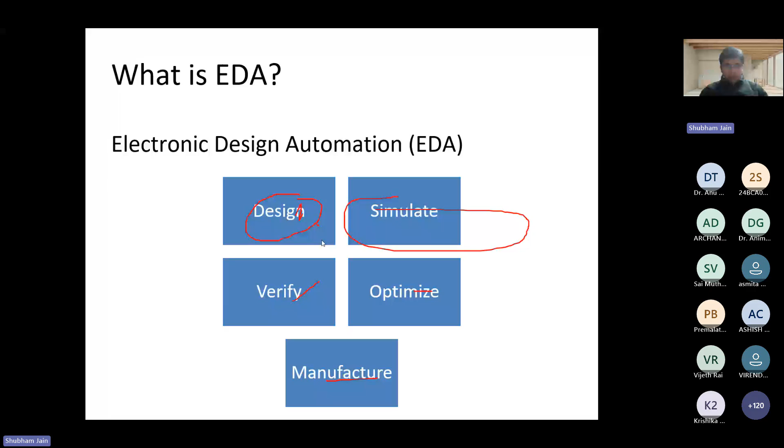So this is it. Just a moment, I need to give me a second, I'll be back. Just a moment, I think my daughter has some problem. Give me a moment.

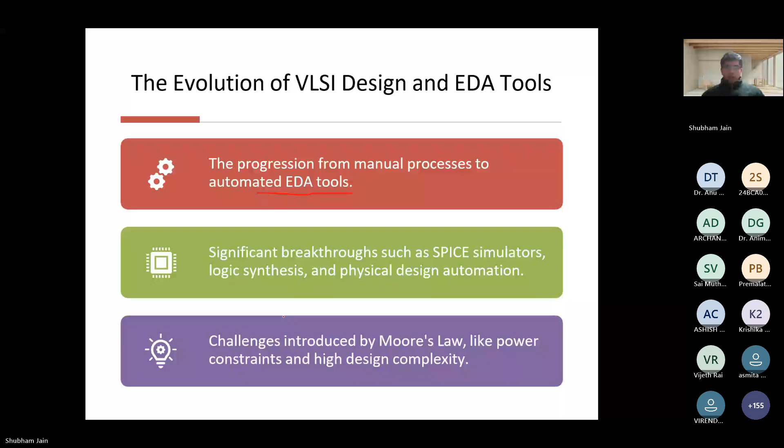Next, coming to key categories of EDA tools. These are the different phases of a design process which a company normally follows. There's a front end wherein the intent of the design is captured using HDLs, for example Verilog, System Verilog, or VHDL. At this level simulation is done, and also for the analog side, schematic capture is done.

Now let me explain what is RTL. Basically this HDL, or RTL step, is where HDLs are used. It describes the data flow between registers in a behavioral manner, which typically abstracts away gates.

Now coming to mid-level, the logic synthesis part. What basically happens here is RTL to gate-level netlisting, which is optimized for speed, area, and power - PPA, power performance analysis. The input to this is RTL, different constraints, and standard cell libraries.

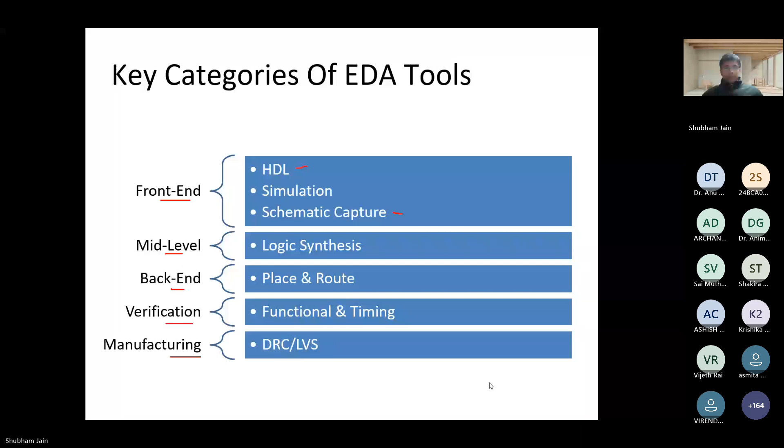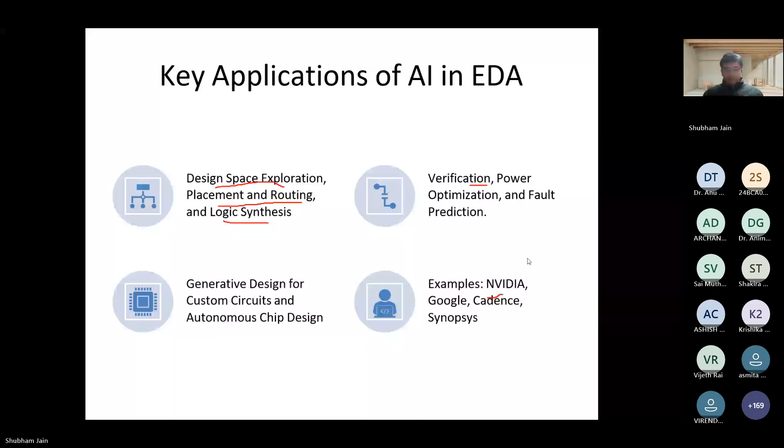I wanted to elaborate on this place and route technology because this is one of the areas we have worked on in AI. Basically, we give the system an input versus output mapping of the ICs, chips, or boards, along with how good or bad the placement is, and then train the model.

So what I'm saying is we capture the schematic — I'm talking from an analog and mixed signal point of view in this slide. We capture the analog and mixed signal intent in a schematic, and then move to the backend, which is the layout side, taking some of the intent from this step to the layout step.

At that step, we do the exhaustive design search. Now that we've come to the PCB level, we do all the permutations and combinations to see what is the best fit from the standpoint of routing, power performance analysis, and timing analysis. So basically we have three key areas on which we evaluate the model.

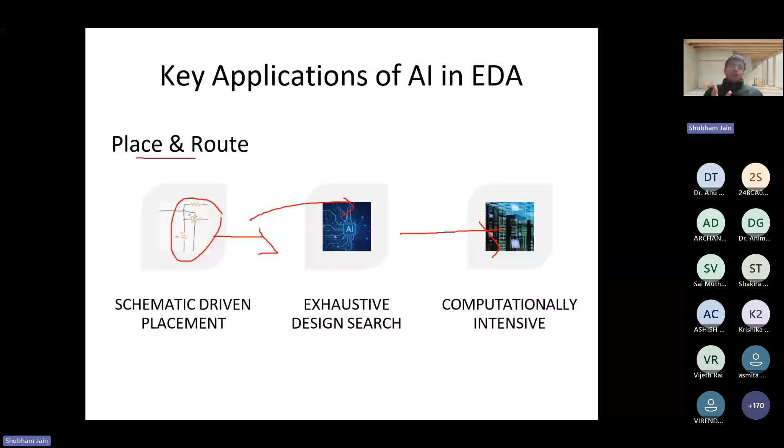This is a highly computationally intensive process. So one of the areas currently growing is how to minimize the size of the models. LLMs are huge, so what we are currently working on is fine tuning the LLMs and shrinking their size to be used on basic machines. This is tricky, but we are in the process of doing that.

Another key application of AI is AI driven content creation. As you all know, when a manufacturer like Nvidia, Texas Instruments, or National Instruments develops a chip, they ship a data sheet along with it. That data sheet is a gold mine. It has lots of data inside it, and designers read through those data sheets manually. So what we can do is develop different solutions to capture different information at different stages in the design step.

This is an example where academia can come in and do a lot of research. We can leverage different AI techniques to create models which are used further up the ladder.

So at the end of it, assume there is a design engineer sitting in a company called Qualcomm. Currently, he or she is reading the datasheet to get answers like: what is the operating voltage of this pin? What are the pins in this chip? What is the description of each and every pin? Whether this pin is active high or active low. All this information he or she would read from the data sheet, and it would take a lot of time.

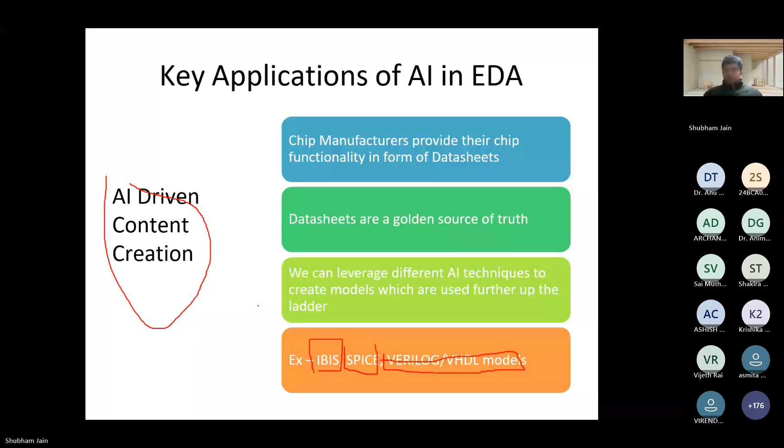Next is the VLSI development cycle. Basically, what I'm trying to say is, after AI is enabled in the EDA, each and every step in the design cycle would have some information to be taken out from those AI models. This is how the new world of VLSI would look like with AI in place.

It will understand all the phases of the design cycle, like design exploration. Here, companies are working on using transformers, encoders, decoders to automatically find a list of good optimized designs for a given specification in natural language. So the design engineer would query in natural language.

Just like students or faculty currently use ChatGPT a lot, they query in normal language and get the answers. This same technology can be used on the side of EDA, or on the side of product companies like Qualcomm and MediaTek.

So essentially, what it would do is speed up all the later stages. If I have the optimized design at the first step itself, there won't be any need for optimization. I can straight away go to verification.

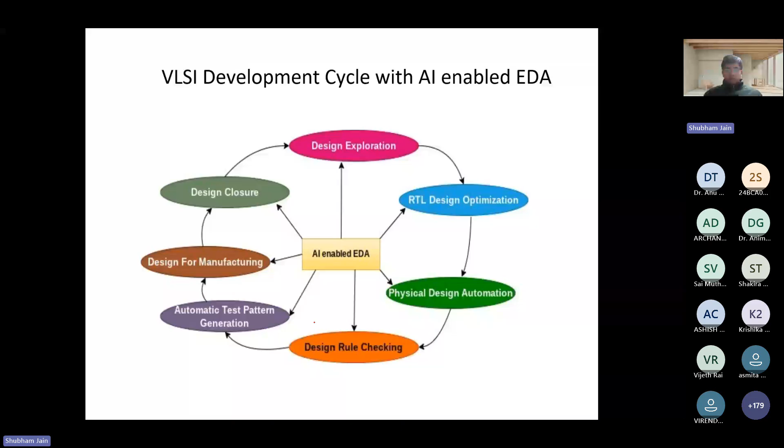DRC is another such area which is heavily using AI, because it has lots of data. Data is king in this era of AI.

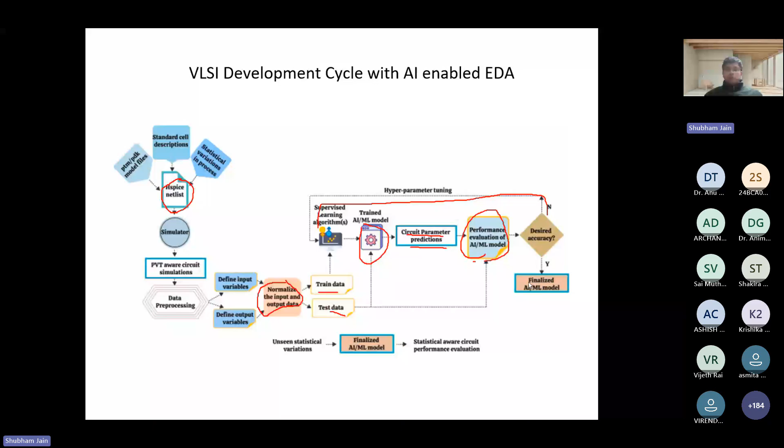Semiconductor manufacturing is another such area which can use AI heavily because it is highly data intensive step in the whole design cycle.

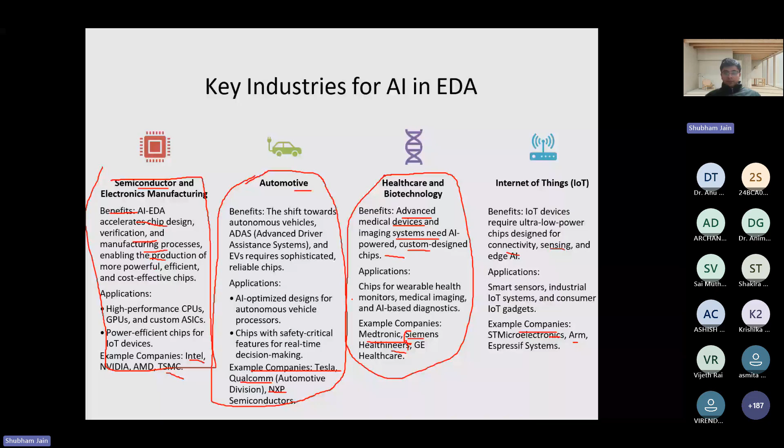So this is one such area which academia can come in and basically help the students to get a lot of jobs and high paying jobs, not those jobs of TCS or Infosys. These jobs are typically niche area jobs and high paying jobs. So this is one area where academia can give a lot of research opportunities.

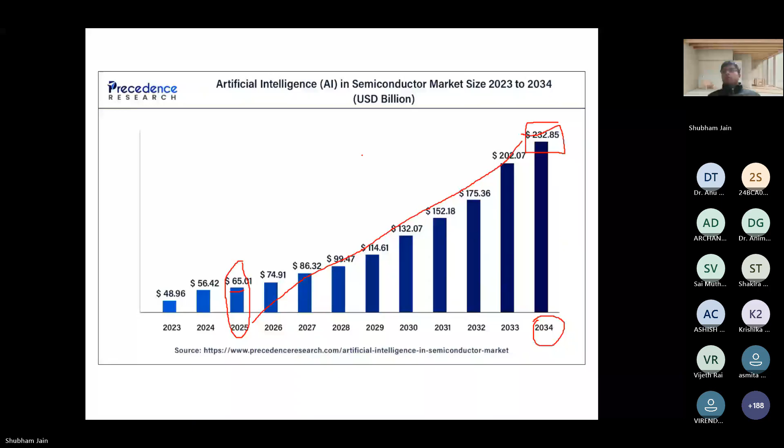Academia and industry itself can come in, have a collaboration to basically open the gates of this industry, open the gates of AI and EDA industry for new software engineers. So this is what I was briefly talking about industry academia collaboration.

So there are a lot of research opportunities in AI driven physical design and hybrid ML techniques. So from that standpoint, there are a lot of research opportunities and internship opportunities for academia students, for college students.

Those are typically doing computer science or electronics. So this area is basically a mix of both electronics plus computers. Academia should encourage more multidisciplinary courses, and I am aware of many such courses in NCU. NCU is one of the leading institutions that is bringing about this change of having multidisciplinary courses between CS, IT, EC, and other streams.

Next is what are the challenges and open problems in AI when we are using AI in the EDA domain.

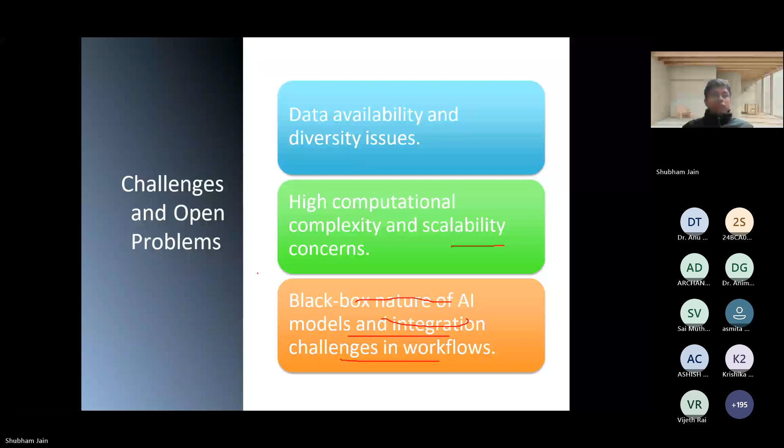Next is future trends in AI driven EDA. What I foresee is autonomous chip design. In some time, an AI powered end-to-end automation would be there, wherein AI would do design exploration itself, then do some kind of optimization, and move on to verification. Design engineers would heavily depend on this technology moving forward, and with the advent of generative AI tools, this is becoming a reality sooner than later.

And what I also foresee is integration of AI EDA advancements into academic teaching as well. There would be a lot of AI enabled EDA tools that industry would give to academia as part of CSR activities.

As part of this FDP program or this whole journey, we should encourage research and collaboration, and focus academic research on impactful short term and long term goals. We should promote collaboration through industry funded labs, joint PhD programs, and internships. There are a lot of internship and collaboration opportunities between academia and industry.

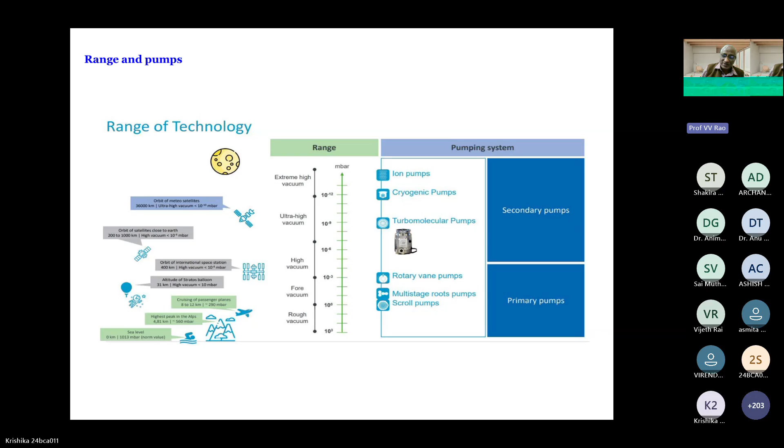So don't bother, I will be doing bits of information. Whenever I tell that, that's that; whenever I tell something else, that is this. But all of them are requirements. So in the limited time, I'll have to cover some aspects of vacuum.

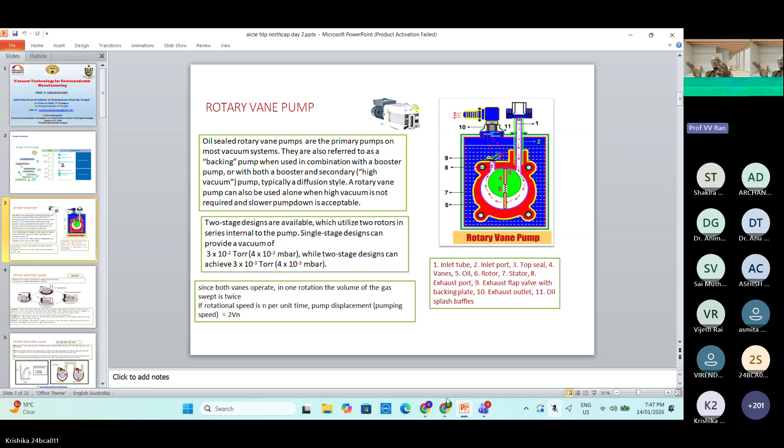There is nothing, so you can straight away watch this. Oh, he has helped, fine, he or she has helped us. Now you can see. My job is simple, but I will make it a little complicated later.

First, just watch this for a few minutes. There is a stator, there is a rotor which rotates, and in the rotor there is a diametrical slot. In that slot there are two plates, and these two plates are separated by springs. Because of spring action and centrifugal action, they will touch the inner lining of the outer box, that is called the stator.

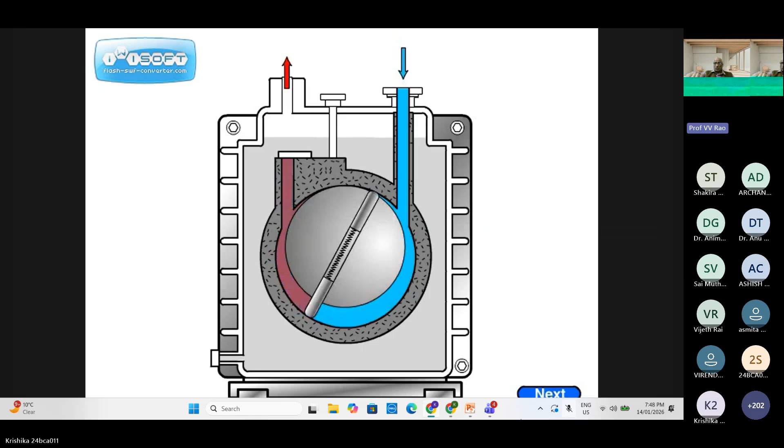The rotor is pierced by a diametrical slot, and it will not become two pieces; it is pierced over a certain length. It is like a cylinder, as 90% of it is pierced through a slot, and through that slot two rectangular vanes are inserted with spring connections, so that the vanes will try to go in the centrifugal action, touching the inner lining of the thing.

So that's how it is shown. If you want, you can show the animation once more. If it is possible. Yeah, animation one, can you please open it again? We have enough time, don't worry.

Whenever you get a doubt, you can ask, because it is down to earth, but at 10 power minus 9 torr it is a high-tech affair. So you can run it on slow speed also, or you can stop it like that.

I'm sorry, I'm trying to make you hurry. Nothing, no hurry, slowly do it.

Okay, now you can just read for your sake, because an engineer can easily follow the things. Just half a minute, read what is there on the left and what is there on the right, one minute. I will explain from the scratch again.

Okay, just read once. It is basically on the right side. I have shown a figure having a rotor eccentrically situated in a stator, and one exhaust valve, one inlet port, and inlet filter. These are all standard words that we see in the day-to-day world. Even a tea making machine also contains similar things. Even the typical squeezer for juice, that double roller type of thing - these are all rotating machines. It is a very simple affair.

But I want you to read once the left side. You may not follow or you may partially follow, that is okay, but still read because you have to understand the words. If it is possible, you can even download all these things on your cell phone and start reading there also. If there is a procedure like that, you can get it instantly, but otherwise please read the things.

Show the slide. The slide is not visible to me, but I hope it is for you. So just read it.

You also read the right side. There are 11 parts shown in the figure as well as the caption. Just try to link it one to one correspondence. I will talk about it anyway.

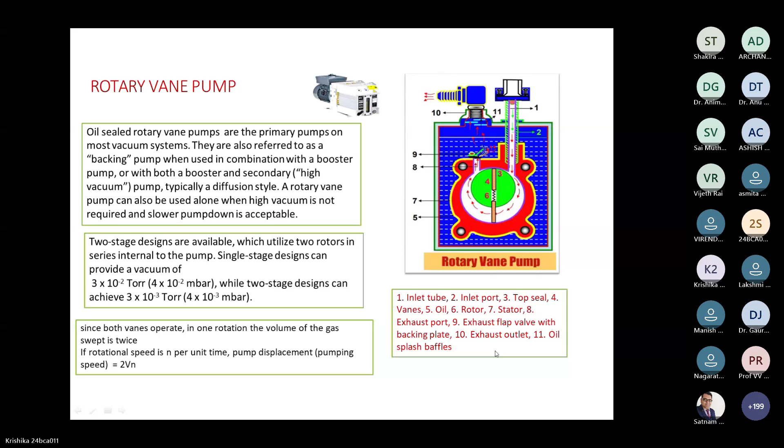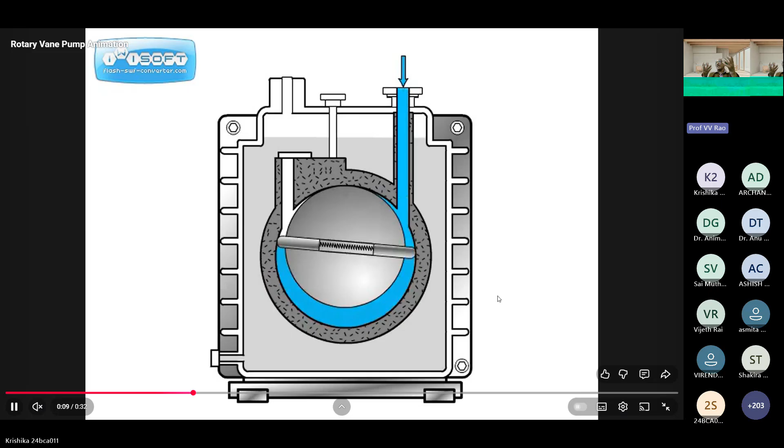But if you want to understand any high-tech vacuum pump, first you should identify the individual components and figure out what is where and what is its duty and why it is there. If you try to understand, then assemble all of them and try to understand again a little bit. It's like electrically first an inductor, a resistor, but when you couple them, you get a circuit. When you add an active element like a transistor, you get another intelligence to that. Similar way in the mechanical thing.

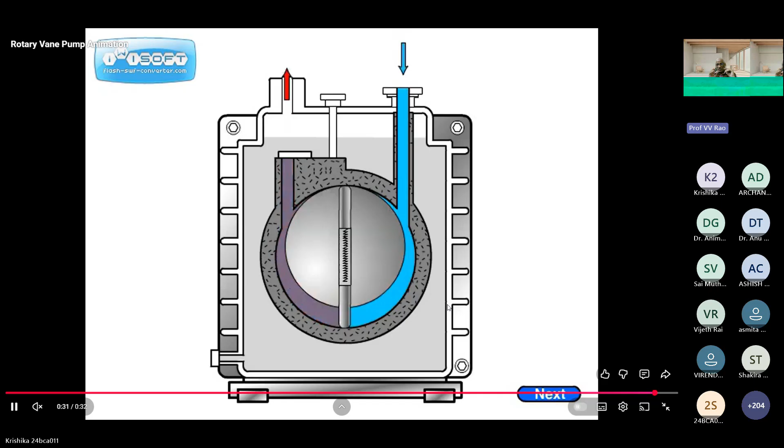Now if you carefully observe, something is rotating - what is that called? It is a cylinder. I have shown a cross section, but actually it's a three-dimensional thing. In the center there is a diametrical slot cut. Focus only on the rotor, don't worry about all the other things. That rotor contains a spring type of thing, and it contains two vanes type of thing. Vanes are nothing but rectangular plates like this.

When they go into this in the long way, because this is a cylinder with a slot, it will go into this slot. Another thing will come from that side also, one slot. These two things are supported by springs so that they will always try to go out. This mechanism is called rotor mechanism with spring-loaded vanes. Now this fellow is eccentrically situated in another circular fellow which is called the stator.

That's also a cylinder, a hollow cylinder - this is a solid cylinder. This hollow cylinder is pierced with two holes in the periphery by two ports, one is an inlet pipe, the other is an exhaust pipe.

Now the exhaust pipe is terminated with a flap valve. It's like if you take a tongue cleaner and try to do like this, it will try to close, but whenever there is high pressure, it will open like that. So whenever you go to some mela, they try to rotate something, and if you're lucky, if your number comes up, you get money, and it keeps going in various sectors, going up and down, up and down. That flap valve is exactly like that reed that tries to open and close, open and close. It will open if the pressure inside this side is more than the other side.

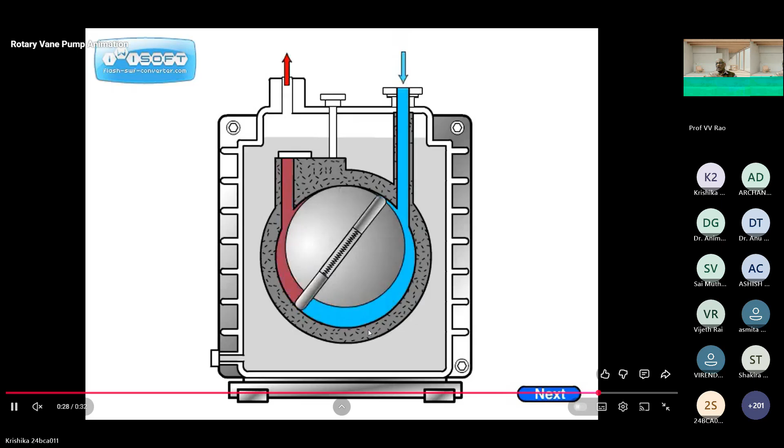So try to understand each piece of equipment just as a machine equipment. Don't worry about vacuum pump, semiconductor manufacturing at this stage now. Within 5 minutes we'll come out of these boring things. But till that time try to understand them as identified individual parts basically - that's the best way to understand any machine in mechanical engineering. Otherwise you'll get tired when you look at a car having so many things. But if you understand each element individually and then couple it, it becomes very easy for you. If you're a mechanical engineer, it's all the more easy.

Now the entire stator and rotor assembly is submerged in oil. That crankcase is also called the oil tank. So there is an oil tank, a crankcase, a stator, a rotor, two vanes, springs, an inlet and exhaust port. The exhaust port is connected to the exhaust valve, and the inlet is connected to the actual semiconductor manufacturing chamber.

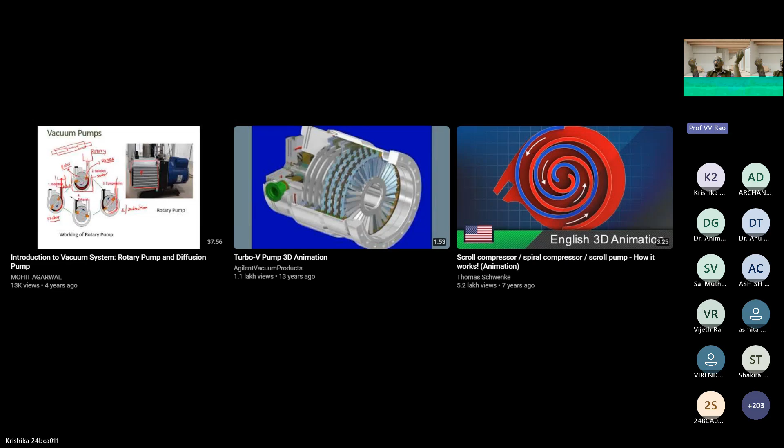So which is at atmospheric pressure. Everything is at atmospheric pressure to start with. There is no vacuum at that time. Everybody, when we were born, we don't know even ABC - we'll have to start learning. Same thing, in the beginning the chamber is at atmospheric pressure. There is no vacuum, no semiconductor, no electronics, no software, nothing.

Now this pump, what it will do, it will suck some part of the gas because of the volume increase, because of eccentricity.

There is a joke also in the rotary pump. Sometimes eccentric people are responsible for all the discoveries. Normal intelligent people can understand things better, reproduce things better, do things faster, but they cannot invent. It's only the crazy ideas, crazy people who are eccentric, they can easily do it.

Same thing here in this rotary vane pump - the rotor is eccentrically situated in a stator, so that it is almost touching. If the rotor is here, the stator is here, it's almost touching at the top. See, if this is my rotor and the stator is there, it's almost touching - you can see there also. So there is a bottom with a lot of gap, but these vanes are trying to touch the inner lining. So there are three touch points: one is the rotor touching the stator, that's called the top seal, and the two vanes are touching because of centrifugal force at two other points. So in a rotary framework, if there are three touch points, you will get three volumes.

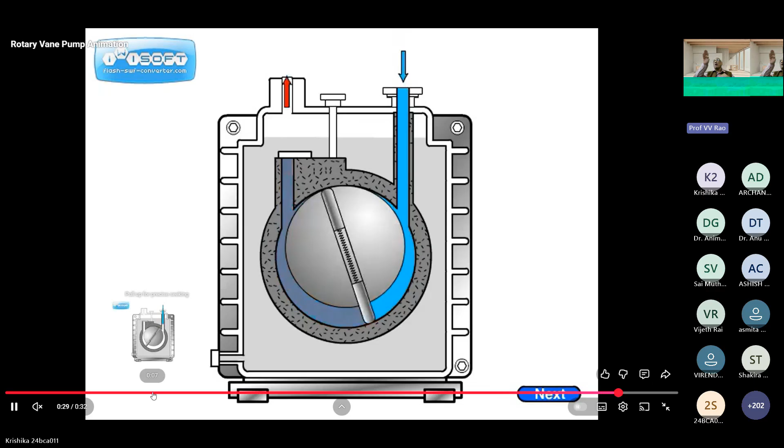Is it not concentric? If it is concentric, you will get only two volumes because the third point is not touching. It is like a stator and rotor, with two vanes. Even though vanes are there, top half and bottom half, only two volumes result. Two volumes cannot do compressor action; three volumes are required. That is the heart of the rotary vane pump. So this is the construction of a typical rotary pump.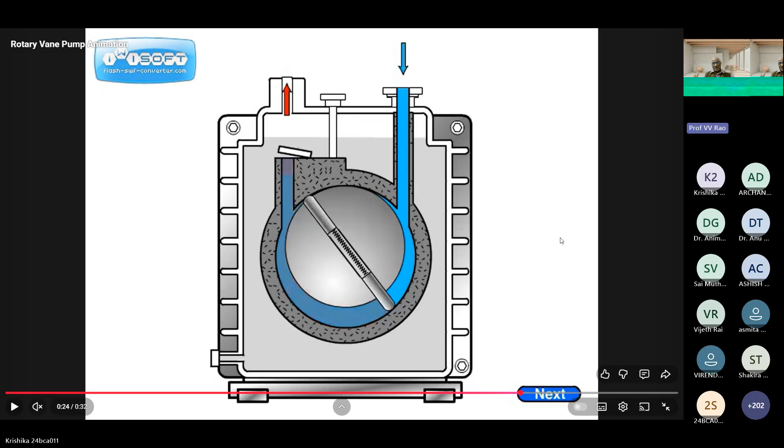You must be getting some idea from the animation already. Now go back to the still picture. Zoom that figure a little bigger.

This was a cross-sectional view of a typical rotary vane pump, which is there in almost every vacuum pumping system. If you understand the rotary vane pump, it is heavily manufactured in India as well as abroad. Depending on the type of material, quality, and finishing, the cost changes.

Very high quality rotary pumps can produce 10 to the power of minus 3 torr, and normal Indian pumps can produce minus 2 torr. But these two are good enough to remove 99.99%, because whether you go from 1000 millibar to 1 millibar or not, already 99.99% has been removed.

The cost of these pumps is only 30,000, because it contains some stainless steel cylinders, rotors, lubricating oil, crankcase, one exhaust valve, and an inlet valve.

When the air is being sucked, if there is some dust or anything in the chamber, the dust should not enter this rotating machinery. Otherwise, instead of a rotary pump, it becomes a grinder, because the dust enters. It is only supposed to suck the air, sweep the air, compress the air, and make the exhaust valve open to throw it out. These are all the four sections.

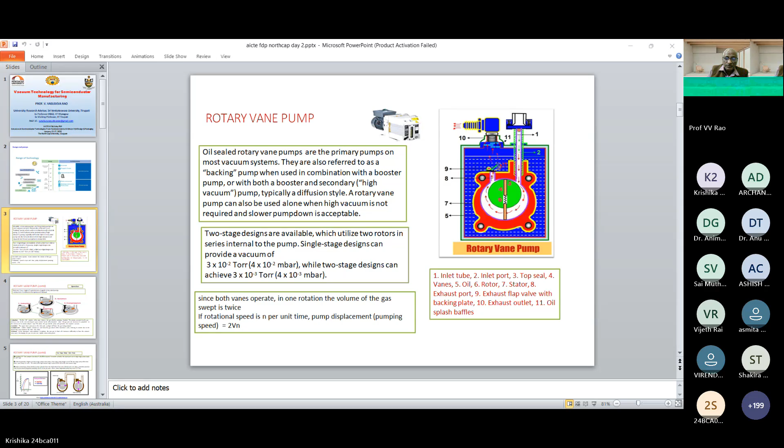The third stage is compression, because volume is decreasing. The right side volume is increasing, the left side volume is decreasing. For the same number of molecules, when volume decreases, pressure increases; when volume increases, pressure decreases. So on the suction side we get increasing volume, and on the compression side, decreasing volume.

And the pressure in the dead volume, which is not coming into the rotary motion framework that's connected in the body of the rotor, that's called dead volume. It is there like top dead center, bottom dead center of a typical IC engine. Same language here: if that pressure is more than the atmospheric pressure plus the hydrostatic pressure of oil in the tank, then what happens?

The valve opens because it is hinged, a small rubber diaphragm hinged between a metal plate and the top of the exhaust port. So it pops up like this. Whenever pressure is more, it opens, and as soon as it is exhausted: sucked, isolated, swept, compressed, exhausted - these are the four stages.

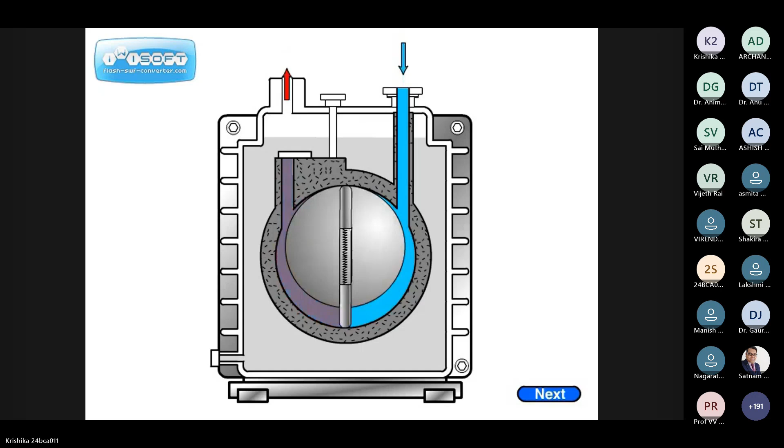Anyway, I hope you got something. Actually in the class to our BTech boys, we try to open things and explain parts, identify them, then run the things, design, and it takes 3 to 4 hours even for a pump. But here I have to take half an hour or 20 minutes. That's why it is tough, but it's not difficult, you can easily follow it up. After that also you read these slides, and if there is any doubt, you can always call me.

Okay, assuming that you have understood, this is called a rotary vane pump. This pump, what is its role? It evacuates the chamber from atmosphere down to 10 to the power of minus 2 torr. What happens at 10 power minus 2 torr? Why can't it keep on removing the air? You don't require another turbomolecular pump or high vacuum pump - can it itself produce that? No.

Because there is a finite dead volume, it's not zero dead volume. So when the pressure in the chamber is going down to 10 power minus 2 torr, even after collecting, sweeping, isolating, sweeping and then compressing, the exhaust valve is not open because that much volume has been collected, extra volume, and isolated. That much volume is compressed into this much dead volume. And even under the dead volume, the volume is not zero, the pressure is still less than 1000 millibar.

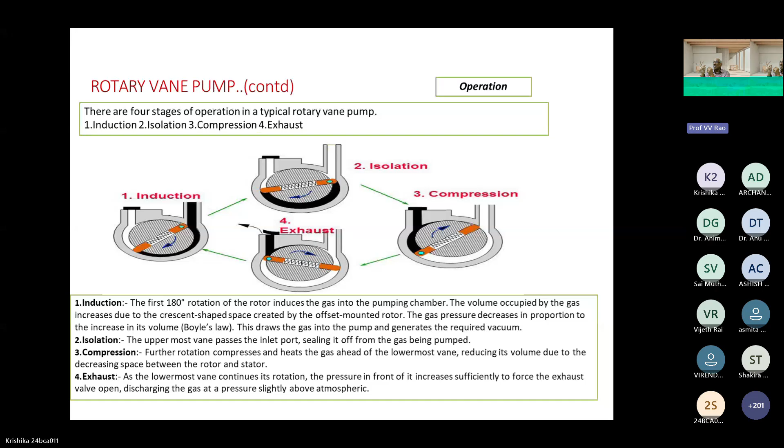It costs 20 lakhs, because your molecules are pumped, turbines are rotating at a high speed of 1 lakh revolutions per minute, thanks to the offshoot of turbo machines in planes, and with magnetic bearings etc., a mechanical fellow is rotating. We'll come to that later.

A typical fan rotates at 1500 RPM with a slip factor of 0.5. Otherwise, typical full speed is 3000 RPM, 50 Hertz into that speed. If you have 2 pole motors, you know the typical formula for the speed of a motor. I'm not going into that electrical side.

But whenever you are talking about machine theory, you should also tell the power requirements, friction requirements, energy analysis, exergy analysis, and rotating assembly. What is the maximum compression ratio? And is it producing heat? Heat of compression is how much? All that you have to do.

So the oil is doing that role. Oil is acting like a coolant because it's a huge thermal mass, and that entire crankcase has got fins. So it transfers that heat of compression through the oil into the body of the crankcase. Through those fins, that heat is taken out by natural convection into the room. So one of the roles of the oil is as a coolant.

The other role of the oil is sealant, because compression is on this side, expansion on the other, there is a top seal. It is not fully touched, if it is fully touched it is welded, but it's not that, slightly this micron gap is filled. That is called sealant. So the same oil is doing sealing duty, the same oil is doing cooling duty, the same oil is doing lubricant duty, because the vanes are rotating. There is a machine mechanically scratching, but they should not scratch as they're used. So it is a sort of lubrication.

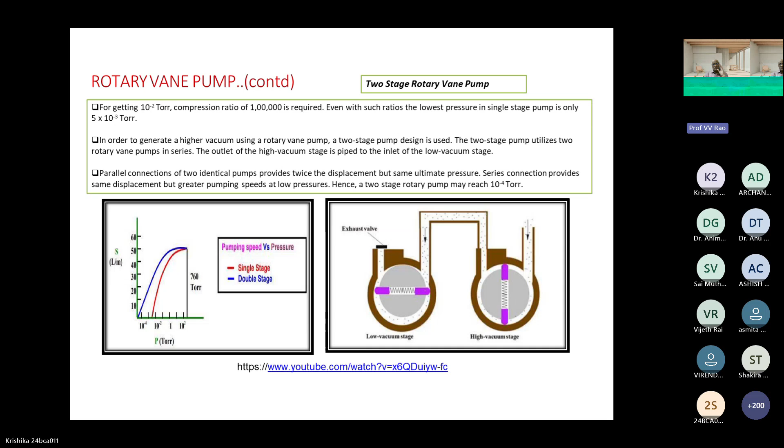So this is how the rotary vane pump is manufactured. Initially, have you understood something? I hope so. But otherwise, it's a mechanical device. If they give me 2 hours time, I can keep on talking, but that's not possible.

We have to go to ultra high vacuum. Then we'll have to do some troubleshooting. That's why this much is enough for the present.

But there was a problem. Supposing the engineer was tired in the hot summer, and he puts a drop of water in the chamber, and then connected it. He was not seeing that small drop, and it produces a huge amount of water vapor at 10 power minus 2 torr. And when water vapor is to be removed, instead of air removal, water vapor under the compression zone, since it reaches the dew point, okay, so what will happen?

It will form a droplet. Instead of gas compression, it's a vapor. There is a difference between vapor and gas. Gas can only be compressed. PV is equal to nRT.

But the state of the matter has not changed. Vapor is not like that. When you compress the vapor, it becomes liquid. When it becomes a liquid, it follows the gravity law. When it is a gas, it follows the delta P law -- pressure drop, flow will be there. But if it is a liquid, it is a gravity potential, delta G, delta X, so it is mgh. Delta H is more important, whereas for the gas, it is delta P.

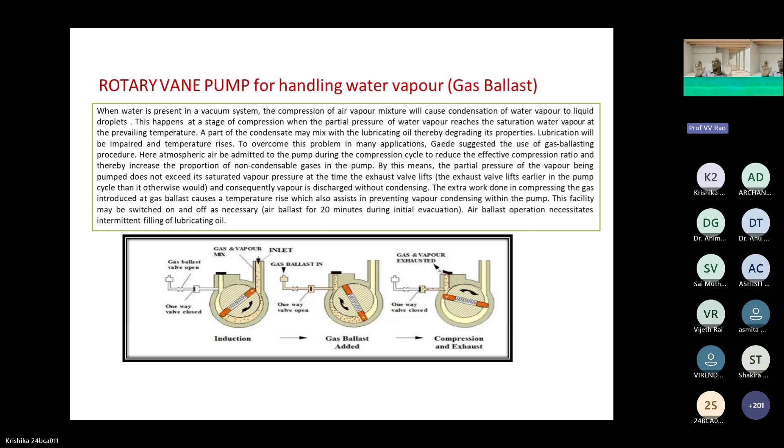You can read it at your leisure later. So I just wanted to explain that. This problem, if it is solved, then only we could use this rotary pump. This is the story of the rotary vane pump. Next slide, please.

Now we have got 10 power minus 2 torr with 2 stages, water vapor removal with air ballast, all the concepts: rotary concept, rotor, stator, eccentric, oil, lubrication, sealing. This is mechanical engineering. But now we are going to molecular engineering. It's somewhat different from mechanical engineering, but it looks like mechanical. It's not mechanical, it's molecular.

So I want to explain this also for some time. Turbomolecular pump, it's tough to understand because it's a molecular phenomena, but it's not difficult. I think time is running, so I'll have to be a little faster, otherwise I'll leave it for some other time.

That's okay, but turbomolecular pump is the heart of all semiconductor manufacturing. Most of the cost of semiconductor manufacturing goes into these pumps, the chambers and the seals. Rest of the materials all together maybe 100 crores, but 500 crores goes into these vacuum chambers, vacuum flanges, gold gaskets, copper gaskets, turbomolecular pumps, maintenance, rotary pumps, interconnecting pipes, their design and manipulators - all this mechanical stuff.

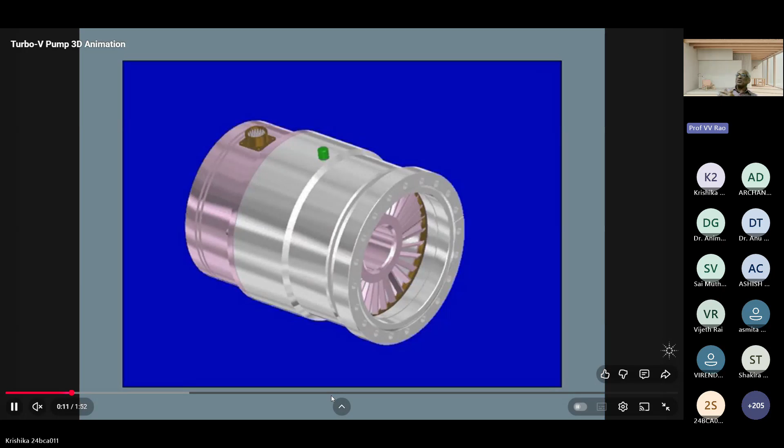So what will happen when all of them are pushed? They come down to minus 1 torr now. The rotary pump's pumping speed had fallen to zero earlier. This rotary pump can now easily take it up, because earlier it was not able to take it due to 10 power minus 2 torr. But the turbomolecular pump pushing it, giving some extra pressure, now the rotary pump can easily take it.

Now here is the animation of the turbomolecular pump. Just watch this, and after that go to that slide. First, see this.

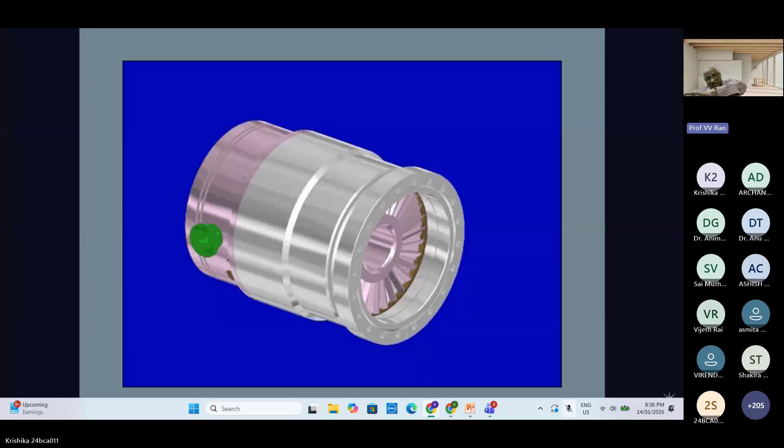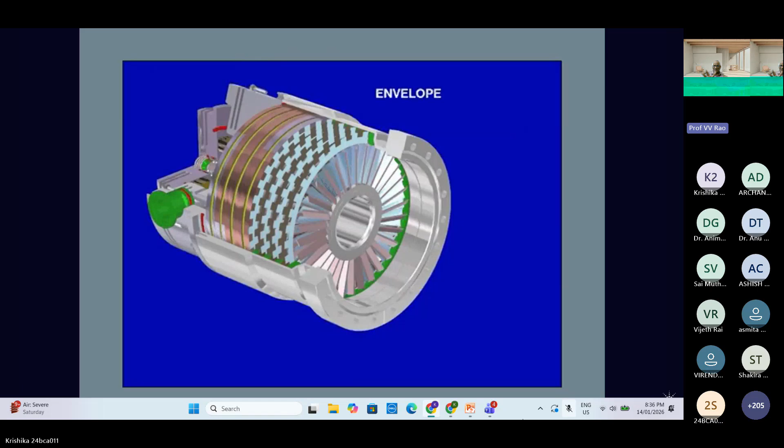So there is a front connection flange, it is connected to your chamber. On the front side, that is the high speed turbine. In between two turbines, the black thing is called the stator, which is not very clear here. So alternately, stators are supported from the body and the rotors are supported by the central shaft. So when it starts rotating, molecules are pumped from this side to that side. This is the static structure, this is my envelope.

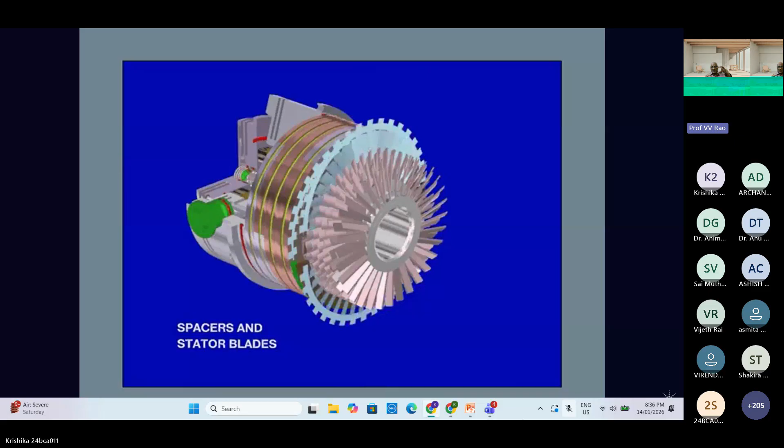See how they are removed, these are stators. There are spacers in between, because the second stator, third stator, fourth stator, they have to be separated and they should be clicked to the body.

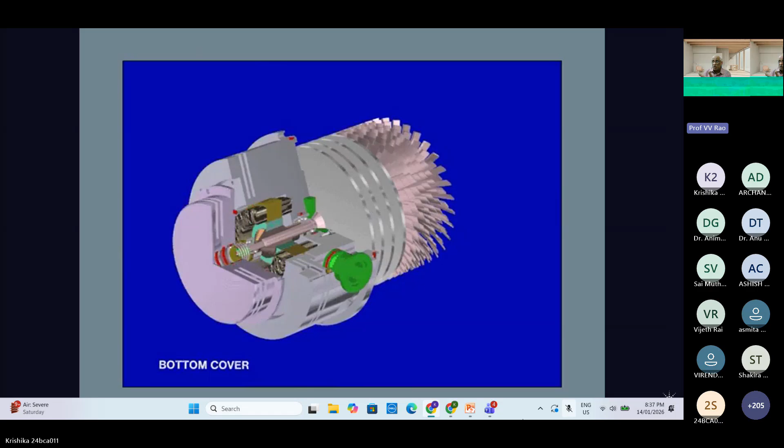Now these are the rotors. Afterwards, some additional drag stage is added to this turbo stage because that is anyway a viscous region, a molecular region. So that viscous region also adds additional drag. All that, finally, we have to create enough pressure so that it comes into the working range of the rotary pump.

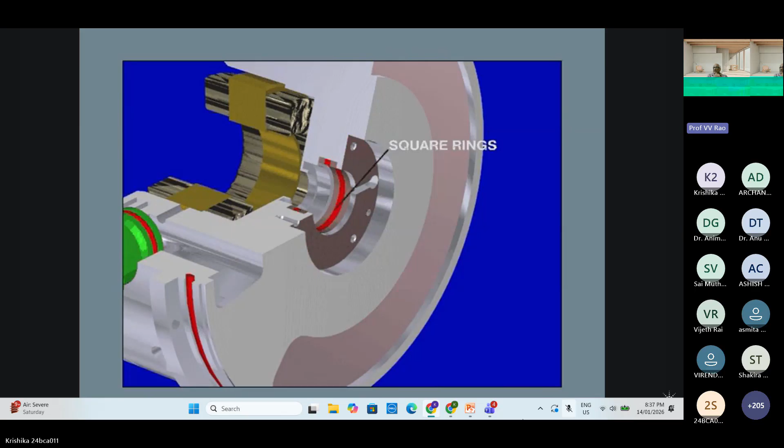So this is the bottom, that shaft, how it is connected to the motor, and then shaft seals and lubrication, wick bearing. In the bottom side, it's a -1 torr, even if it is impure it doesn't matter. But in the top side, it is connected to the semiconductor chamber, so there we are not allowing any impurity contamination. All the precautions have to be taken, that's why it is costly.

99.99% that fellow is taking. It is like a typical coolie at the station. He is carrying much more weight than you. You are carrying a small bag, but your salary is 1 lakh and his salary, his day-to-day life, is very small. So it is not that the intelligent work is not there.

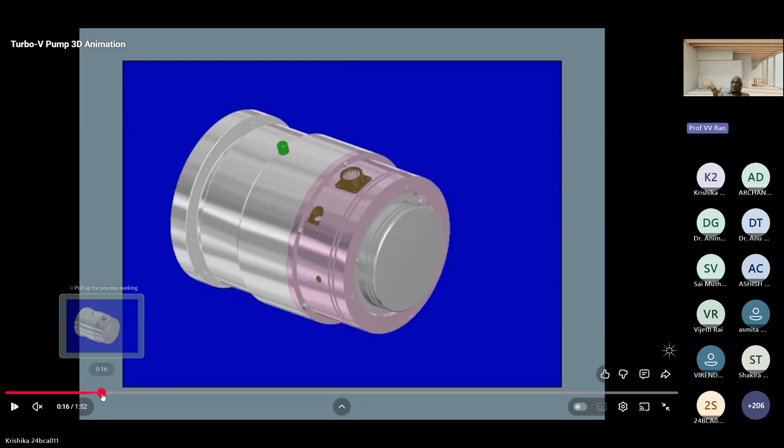See, these high speed, ultra high vacuum pumps, they are trying to reduce the molecules, not the gas anymore. So the nature of the work will be different, the payment will be different. That's why it is very costly.

So see this animation and now go back to this. There are other animations also which I have not shown here. Actually, when the rotor rotates, I gave a wrong thing. But anyway, you can get a series of animations on the net. If you go to the turbomolecular animation, if you have time, you can see that also. Otherwise, try to read this for 2 minutes, right side and left side, with the understanding we are given.

If each stage has a compression ratio of 5, and there are 9 stages, what is the total compression ratio? Can anybody tell? Open this one or even the chat box. There are 9 sets of rotor and stator, each one converts velocity into pressure. So that way P1, P2 is there, compression ratio is there. If each stage is 5, and there are 9 stages, what is the compression ratio?

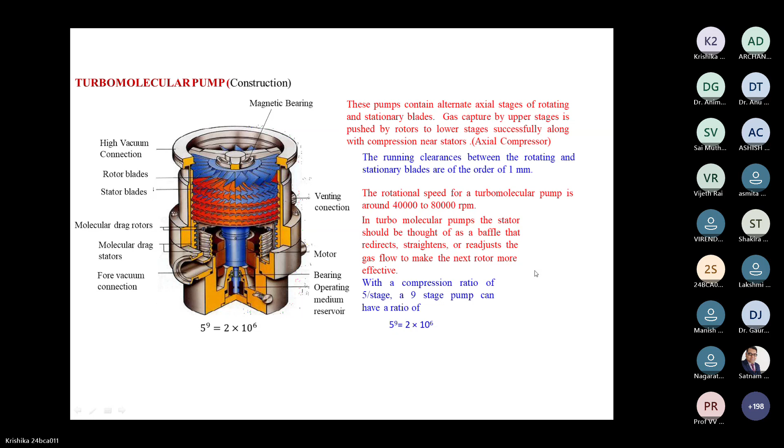Hope you have understood a little bit. But anyway, there are very good animations, and you can go through them at your leisure. Otherwise, we can go to the next slide so that you will get a feel of it.

So, for the turbomolecular pump, the pumping speed is constant up to 10 power minus 9 torr, because at higher pressures, if there is 10 power minus 3 torr, 1000 molecules are removed, if it is 1 liter. At 10 power minus 5 torr, if 10 molecules are removed, then also it is 1 liter, because 1 liter contains 10 molecules at 10 power minus 5 torr. That's why pumping speed looks constant, in liters per second. But this liter at minus 9 torr is different from that liter at minus 3 torr, because P is proportional to the density.

That's why in vacuum, instead of mass flow rates or work done, people don't bother about V into rho. Even PV is a very good thermodynamic quantity, PV represents work. Actually, when you get volumetric flow rate and multiply by density, you get mass flow rate. At higher pressures, it is customary to measure mass flow rates because you can measure grams per second. But in vacuum, how do you measure micrograms? So instead of rho dV by dt, you make P dV by dt, because P is proportional to rho anyway. That's how there is an additional concept called throughput, which I'm not going to explain fully.

So vacuum pumps are like that. If you try to understand all that, you will get a feel of it. And how do you match the rotary pump with the turbo pump? Because whatever the pumping speed is at that pressure, multiplied by the volumetric flow, should match at the exhaust of this turbomolecular high quality pump, it has to be finally removed by the rotary pump up to atmosphere. The turbo pump can only pump from 10 power minus 9 to minus 3.

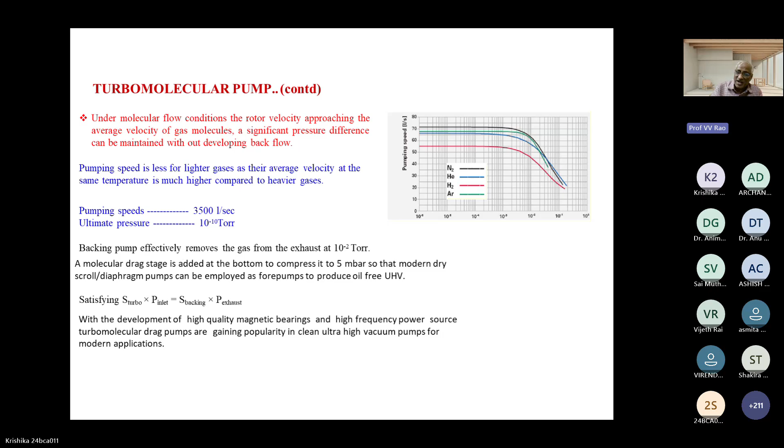So these are the various applications, I don't have to explain why this is important. I just ask you to go through it for a minute and read all this. We have understood the turbomolecular pump, rotary pump, and the connections in between, oil. Here there is no oil, no lubrication oil etc. Otherwise it will degas, it will outgas, providing additional molecules which will interfere with your silicon molecule because they are hydrocarbon oil molecules. They are not allowed, they become an impurity, they will dope it. N-type becomes P-type, and with all the fab design, it becomes a failure. So you cannot have any contamination. The very idea of 10 power minus 9 torr is to produce a contamination-free atmosphere. Now you are contaminating with the oil of the pump, not allowed. So there are dry pumps, and the turbomolecular pump is a dry pump, which is the ultimate and last stage of ultra high vacuum. Please go through it for a minute before I switch over to the next topic.

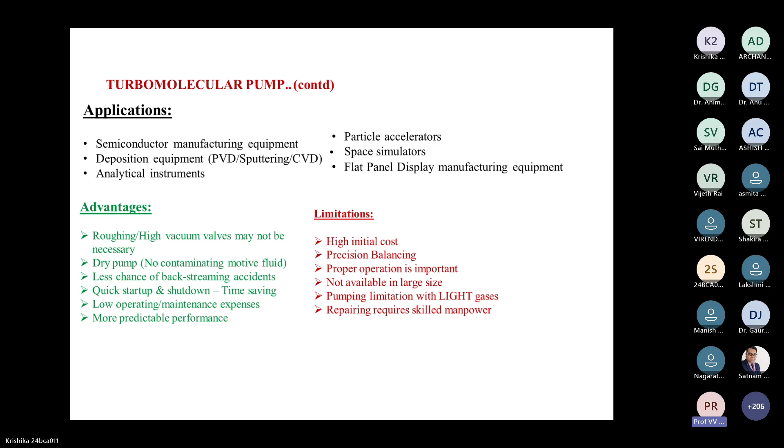These are various components, flanges, valves. The gate valve has a bigger opening, then throttle valves, flexible bellows, straight connections, elbows. These are all the small requirements, just like a tailor has got not only materials and cloth but also small buttons, wires and seals. They're all required to make your chambers, connecting pipes, and electrical feed-throughs, all of which are required for the manufacturing of semiconducting materials. It's not just material making, it is device making.

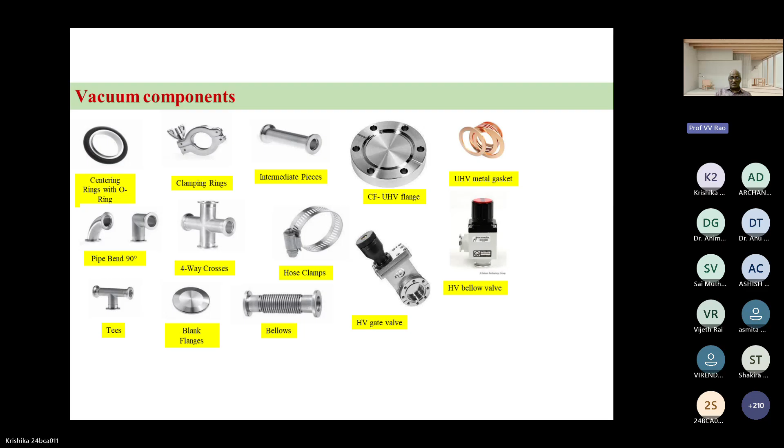It has to perform a certain operation, 0, 1. Several lakhs of zeros and ones have to be done at high speed. So naturally, the precautions are accordingly very fine. Okay, next slide please.

If you understood the components, yesterday we showed the system design also. These are various couplings. You cannot make everything a rigid box, there will be some wire, another pipe, two things have to be coupled. So there is an O-ring if it is a normal vacuum, otherwise there is a metal gasket. On the right side, metal gaskets are shown. On the left, top side, there are two couplings with a wire and an O-ring, and that O-ring is centered by a center ring, and it nicely sits between the two mating flanges. Then a wing nut clamp, when you tighten it, the 15-degree angle tapered surfaces of the clamp come into play.

When you are tightening, for a 15 degree angle there will be a sealing force, and the two flanges will be lightly pressed. You don't have to tighten like high pressure cylinders, because the air will be pushing it anyway. You only have to align them and give a little bit of tightening. The air force is much more than the mechanical force you can give, because on one side there is vacuum, on the other air, and that air will anyway make it tight and seal. But you should not over-tighten; alignment is more important.

When it goes to ultra high vacuum, small seals, even the o-rings and gaskets will degas. So instead of gaskets, you put metal things. But metal is metal, and the other side is also metal, so there will be micron gaps, and it cannot seal properly. Rubber can undergo undulations, but metal cannot do that.

What they do is increase the thickness of the flange and machine a fine blade type structure on the two flanges, called CONFLAT. In between that blade structure, a gasket is kept. When you apply huge pressure in tightening, the force per unit area on that sharp edge crosses the yield stress of the copper, and the copper starts yielding and acting as a seal material. But once you do it, you have to throw it away. An o-ring will regain its shape, rubber gaskets can do that, but metal gaskets cannot.

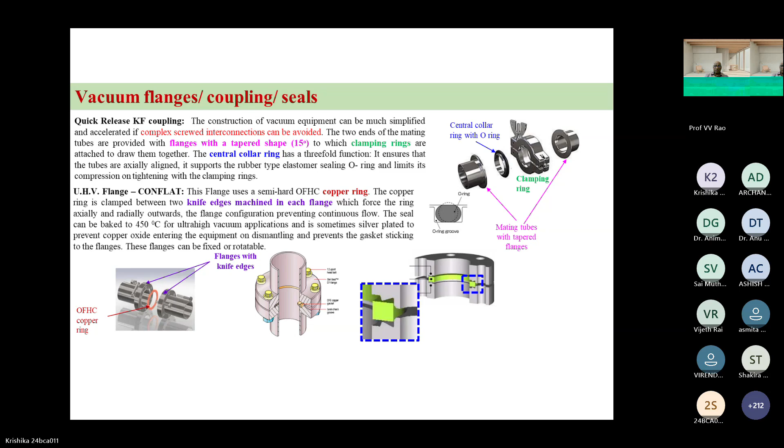These are various wall cross sections, like bellow valves or diaphragm valves, gate valves. Whenever there is motion, there will also be leakage, so you should have shaft seals. There are multiple shaft seals like this, and then couplings, there are ways to do it.

Just like in a water pump, there will be some drops of water coming out of an old pipe in the wash basin - you will see some leakage - that happens because the shaft seals are leaking. Same problem here, you have to take care of all that.

There are bellow valves, butterfly valves, ball valves, gate valves, throttling valves, sometimes gas inlets for silane and various gases without spoiling the vacuum, but spoiling it a little bit. That means throttling - a very small amount of gas is let in for a purpose there. But when it enters from the cylinder, there is a huge pressure drop - that is throttling, which is different from shut-off valves. So there are various mechanisms you have to understand in this pneumatic language.

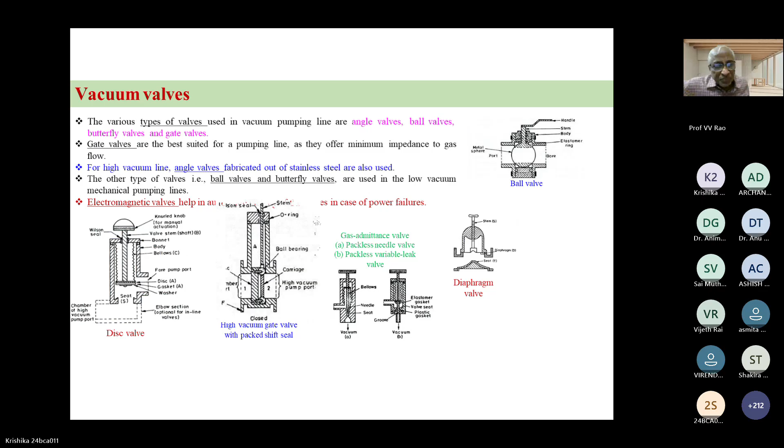There are magnetic seals, bellow valves, and shafts, and how they are coupled. Whatever you try to do outside, the inside connection is given without any manual connection. On the bellow, it will move inside because of flexibility, but the two sides are pneumatically isolated - action and reaction takes place. There is additional motion, tilt, rotation, X, Y, Z inside going on as per the outside, through magnetic couplings. There is a pipe and a magnet - when it moves inside, the iron piece also moves. So through that magnet, like keeping a paper on top and moving a magnet below, the top fellow will move, but you are not physically touching it. Such mechanisms have come, like ferrofluid seals etc. All that is explained here, but you can read more about it on the net.

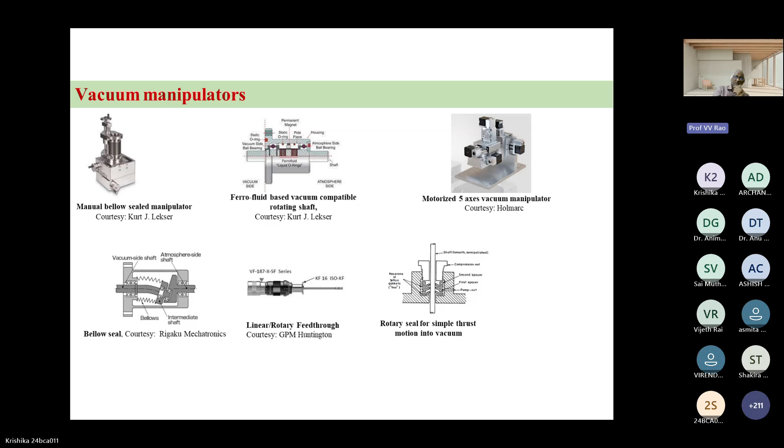With all these things, when pipes are connected, walls are connected, flanges are connected, electrical feed-throughs are given, baked, and clean room people have entered, at minus 2 torr, minus 9 torr, only then things will come on and they will switch on. But minus 9 torr is not coming yet - the turbo pump is running, the rotary pump is running.

Last minute, the space mission stopped because hydrogen supply is not going. Such checkpoints are required here also. Unless vacuum is there, the semiconducting experts, fab design people have no role to play. They cannot start anything. If silicon stays like a vapor, there are no PN junctions, no transistors, no interconnect, nothing.

After getting good vacuum, it goes inside through the load lock chamber, and then you do whatever operations. If an operation theater is not clear, the doctor will not come. Same thing here - if vacuum is not coming, what to do?

An experienced person can feel that. Maybe the pump is not running properly, that's why vacuum is not coming. Or the gauge is not reading properly - actually vacuum came, but the instrument reading the vacuum, that meter, is not reading properly. But vacuum is there, that is the second thing.

The third thing is there is a leak somewhere - not tightened properly, it is going. It is like not properly closing the valve tube of a rubber tire after putting pressure inside. Slowly after 5 minutes, no pressure, because it has leaked. It is positive pressure, meaning inside to outside, but in vacuum, it's outside to inside. Air is at higher pressure compared to the vacuum.

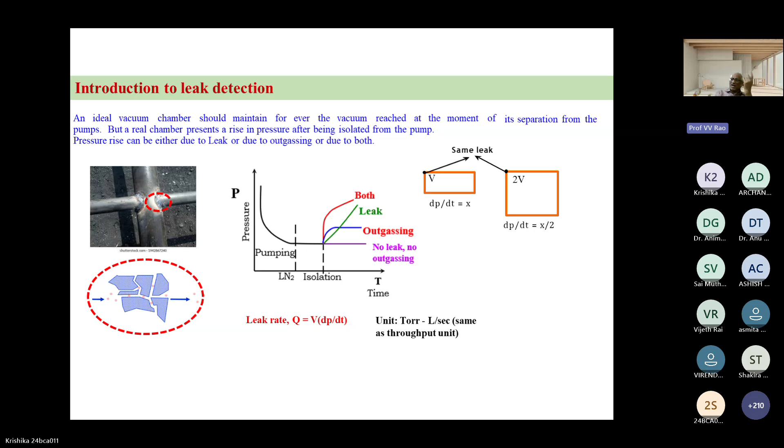Now sometimes you have such a fine leak that pumps are continuously running, not isolated. So it doesn't matter - if the salary is too high, expense can be high, doesn't matter. But if salary is low and expense is more, then you have to be careful. So when the leak rate is tolerable or not, you sometimes get a headache or sickness but don't go to the doctor - but if it becomes intolerable, you go to the doctor.

So that's called first identifying whether there is a leak or outgassing or both, and whether they are tolerable or not. If it's a very large chamber with a very small leak, then nothing, don't worry.

If your salary is 10 lakhs per month and every day some 10 rupees is going as some chore happening inside, you don't bother. If your salary is 100 rupees and 10 rupees is going, you have to bother. So if the chamber is in a bulb evacuation industry, they have to worry.

A bulb is also an evacuated bulb, but because the volume is small, the same amount of a small pinhole will increase the pressure within 10 days, and the filament gets burnt the moment you switch it on. That's how most of the olden day bulbs used to get burnt very fast. Philips company used to be good because their vacuum sealing was very good - it used to last for a year.

When it goes to larger chambers like TV tubes or semiconductor chambers, the same hole leaks air because of pressure drop, but inside, after going in, there's a huge volume so the pressure burst is not much. It's like a big tub versus a small beaker. Both have the same one drop per cc per second, but the level in the glass will fall very fast while the level in the tub will not fall at all.

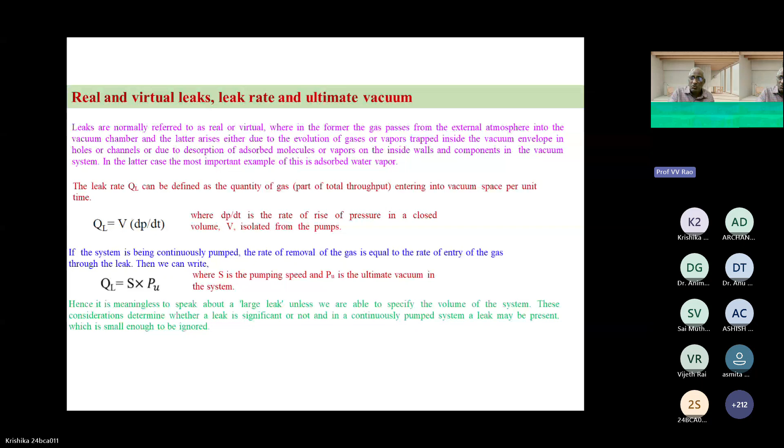Just go through this slide for a minute, I'll come back to it. I'll finish it in another 15, 20 minutes.

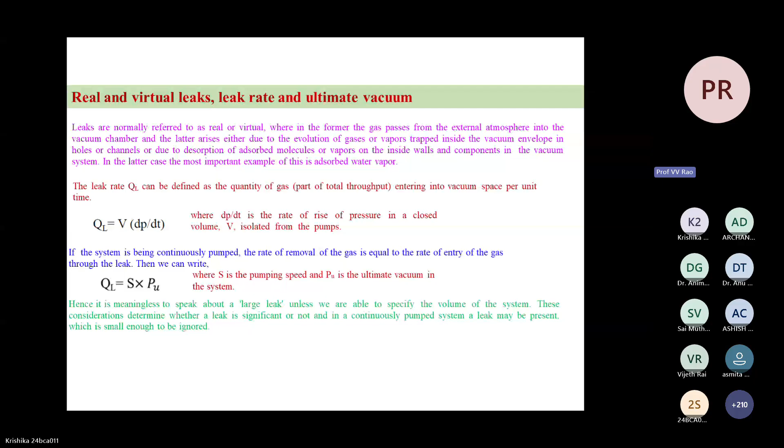Hope you have understood this. Okay, then next slide, please.

Supposing it is intolerable, what to do? But you don't know where the leak is. Somewhere there is one, and you need a stethoscope. Only a doctor can do it, you cannot. You are getting fever, which can be because of any reason, but the doctor will identify by checking here and there, asking you to open this, that, and whether you are feeling hungry. After all these symptoms, he will find out where the problem is.

Same thing in a vacuum chamber. If vacuum is not coming, and if you are not intelligent - of course most of you are very intelligent, no doubt about it - but otherwise you end up on the wrong route and create another problem. If a doctor is a bad doctor, instead of solving the problem, he will give you such a medicine that it creates another trouble. You are not supposed to do that.

So what should you do? You should first identify pressure rise rates and see what the issue is, whether it's a leak or degassing. If it's only degassing, just bake the chamber and remove all that with a rough pump, then forget about the pump once baking is done. Now when you first evacuate with good pumps, it will come.

Okay, but first there are some simple methods for leak checking. Leak checking means leak locating - I know that somewhere there is a leak, but where is that? It can be in some welded junction, some connection point, or the chamber connection, or some feed through is broken, but we cannot see that crack with our eyes.

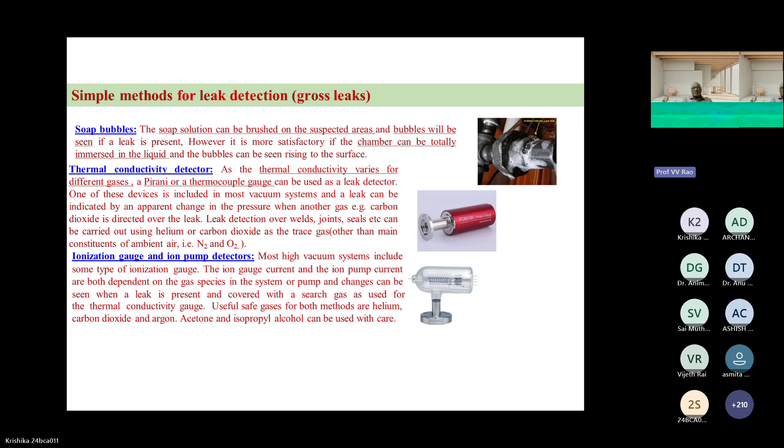So sometimes how do you do that dry test? For very fine leaks, all these small rough mechanisms are not working, so then you go for a commercial leak detector. Next slide, please.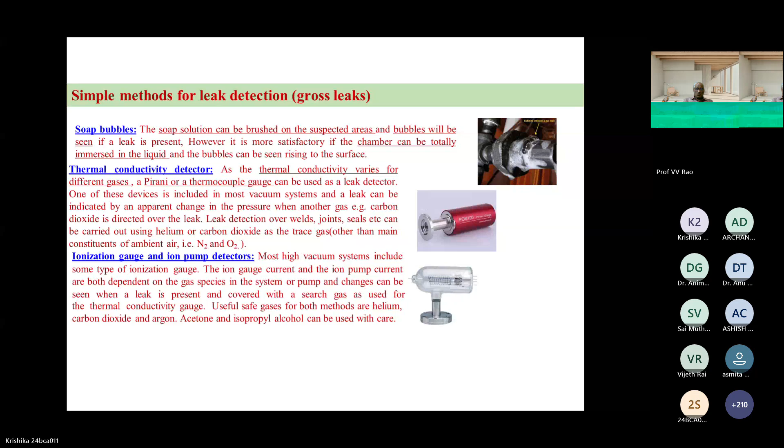Actually, I'm not able to zoom. Okay, forget about it.

So when the pump is connected, you try to spray some gas along with your chamber and pump. There is one mass spectrometric leak detector, which is a partial pressure gauge basically. That is the mass spectrometer.

When you throw in helium gas, because helium is very less in the background ambient, only when you put some helium in the suspected areas of leak do you immediately get a pressure rise. It's not really a pressure rise because the leak detector, which is a partial pressure gauge, is calibrated and locked for helium mass. When normally air is leaking, it will show like a very high vacuum, but when the helium is sprayed, it will suddenly show a high reading.

There is another total pressure gauge which is measuring the vacuum. But here, in addition to the vacuum gauge, you put a mass spectrometric gauge, which is also a vacuum gauge, but this is a partial pressure vacuum gauge. Within that vacuum of 10 power minus 9 torr, there is nitrogen, there is argon. So you are making the gauge sensitive to only one particular gas.

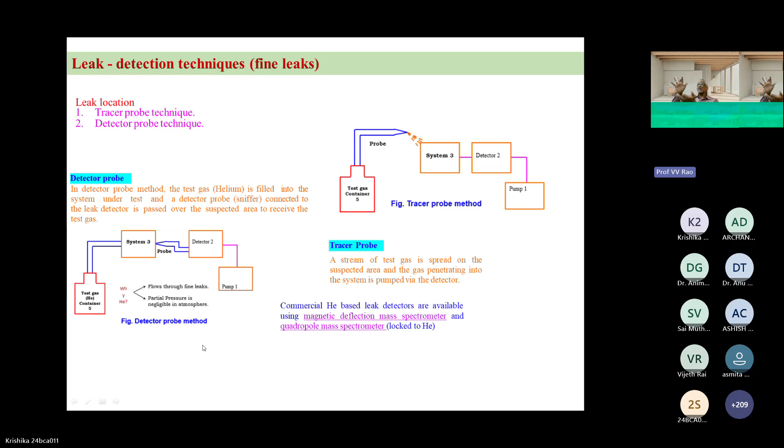It is tuned to the helium. What is that mass spectrometer, how does it work? That's electrical engineering - if you're interested and if they give time, I can explain. Otherwise, just think of it as a tuned partial pressure gauge.

So this is how typically a mass spectrometric leak detector looks like. All the ions are coming in, but it is sensitive to only a particular thing. So the particular helium ion, with electric and magnetic fields, is made to bend. That bending radius is proportional to the mass to charge ratio. So whether it is a quadrupole or a magnetic deflection mass spectrometer, you use these electrical and magnetic fields on the leaking ions and project them onto a detector to get detection of the leak.

Once you identify the leaks, close the leak by sealing it with some araldite or something. Then once all these things are done, first identify the problem - just like when you go to the doctor, he will first do the diagnosis. He will prescribe this test, this test, this test, and only then will he give medicine.

Once you identify where the leaks are, provided you have completely checked all the leaks - if there are two leaks, one on top and one on bottom, by chance you are measuring here and there is no leak there, but the leak is somewhere else. Since helium is light, it goes and leaks, so you immediately get a signal, a sound alarm will come. So you think there is a leak here, but actually the leak is elsewhere. So always leak test is from top to bottom, not from bottom to top.

There are many hints in leak detection, you have to go through it. Why helium? Because helium is not available here, so it will act like a tracer gas. Helium's molecular weight is small, so even through fine holes it can pass through and give you a signal that something is wrong here - there is a hole, a puncture, a crack, or a welded joint problem.

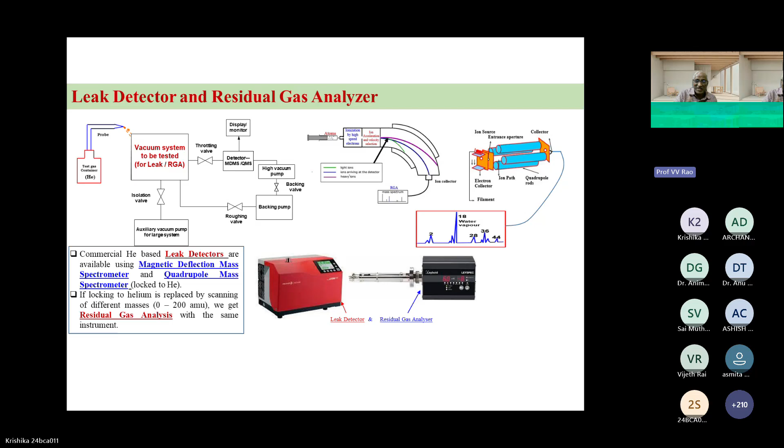So I hope you have got some idea of rotary vane pump, turbomolecular pump, and leak detection, components, etc. Well, you have got only vocabulary, you have got only terminology. I don't think you have fully understood, nor I could make you understand. It's not possible because it is a one semester course. So naturally it takes time. You have to read some books, okay, independently at your leisure, at your pleasure.

You should read on Saturdays, Sundays. Now, instead of looking at cell phones or some other things, you should have a passion to understand the subject and read it continuously on the weekends. That weekend will be very strong for you, I'm telling you.

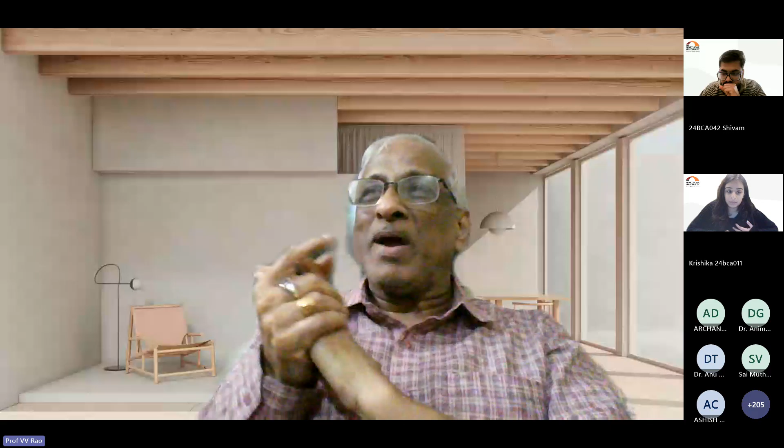I have done one project from a Bangalore company long back: what is the time for killing if a man enters into vacuum? It was coming out to be 20 milliseconds or so.

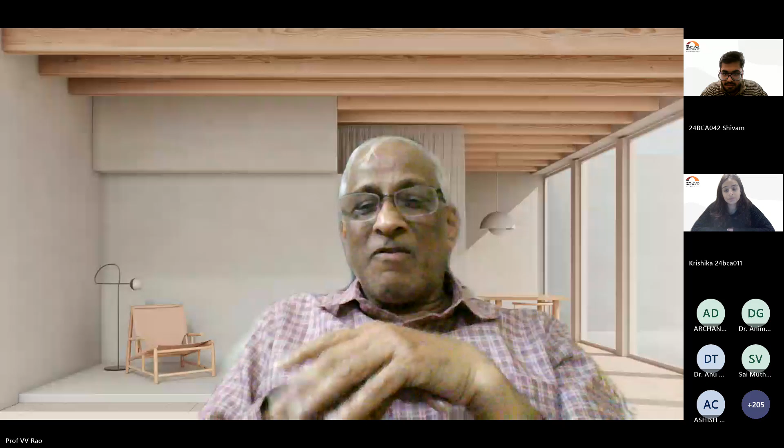Supposing when you are flying at 10 kilometers height, what is the typical height of it? What is that, plane, passenger flight? 10 kilometers, you know that? Why is it 10 kilometers? Because vacuum is created, it's only 76 torr, so without any friction, it is going at 600 kilometers. Then if it is so, why not 30 kilometers? Then it is still less.

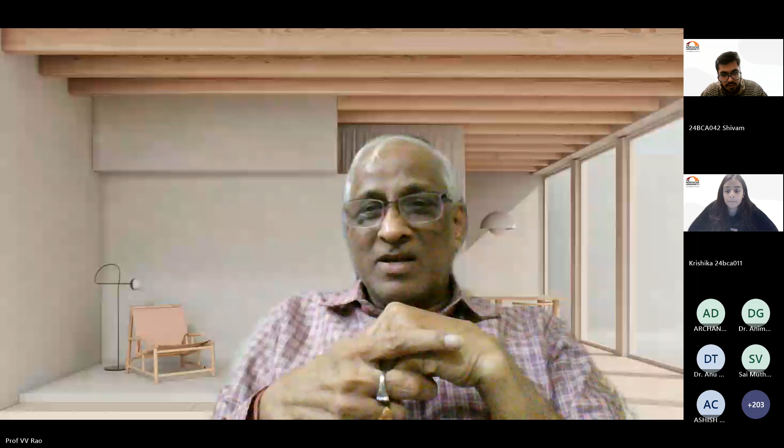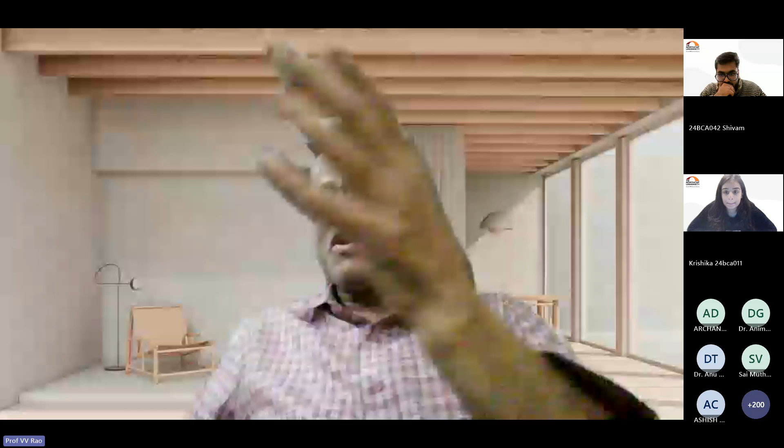That's how rockets are going. No, if you go to 30 kilometers, it can go in the vertical direction with Newton's third law, like a rocket principle, not the cruising flight. Cruising flight requires Bernoulli's principle, the air must be there. The air velocity should be less below and velocity should be more on the top, and less here. So velocity energy is reduced, pressure energy is more - lift force, drag force, thrust force, friction force - these four forces will be balanced at 10 kilometers. If it is anything more than that or less than that, one of them will dominate. So cruising is not possible. So most of the time, the safest way is to travel at 10 kilometers.

Now, anyway, at that time, if there is a window broken - say a small kid breaks the window - the outside is vacuum.

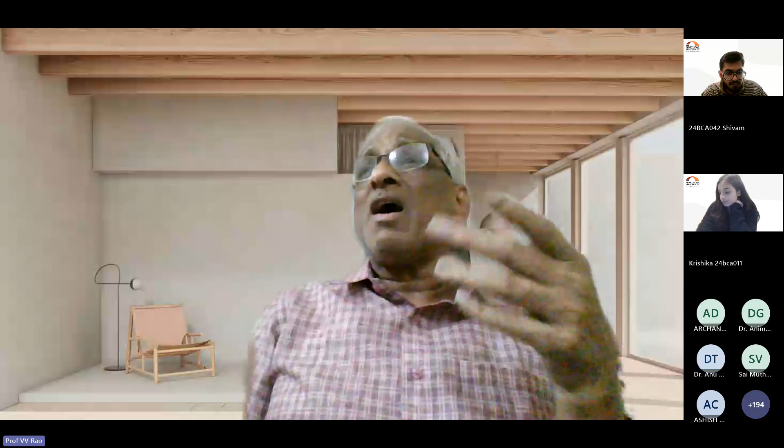It is exactly the question you are asking. An infinite volume vacuum - immediately within a few seconds, all the blood will come out of the body. It's just like opening the door or window of a plane, you will know the fact. Same thing here - if you are entering inside, you will never get vacuum at all because you are degassing so much moisture, etc. Pumps will say forget about it. So it's good that if they start working and producing vacuum, you will die.

How can we know if these vacuum pumps are malfunctioning? If it's a rotary pump malfunctioning, you will hear the sound also, you can feel it - experts can understand very fast. What you do is keep valves here and there, close those valves, and keep gauges. Isolate the pump, only on the pump put the gauge - is it producing vacuum? Then next stage, put it. So stage by stage, if you come, only when the chamber is connected vacuum is not coming, then it's not the fault of the pump, it is the fault of the chamber leak. Whereas if even without the chamber connected, blind also it is not coming, then pump is the problem. That is one way.

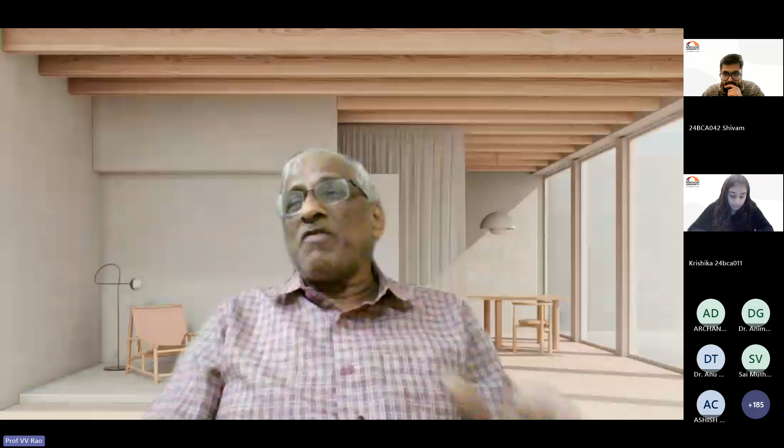Then the pump is running but not at its full potential. That will happen because instead of 10 power minus 2 torr, the rotary pump has given minus 1 torr. Instead of 10 power minus 9 torr, the turbo pump has given minus 6 torr. Why? Because somewhere the number of revolutions is not enough. There is a sensor, RPM level, there will be a board, a breadboard, there is a display system. The display immediately shows - from there you can correlate it. This is the typical error analysis of a computer type.

Same story here - a turbo molecular pump not running means what? The speed of the rotor, instead of 80,000 RPM, is 10,000 RPM. Immediately you can see that on the RPM sensor. Or else if it is heavily leaking, the thrust is so high that air is coming, so the turbine gets a braking force on it. Instead of molecules entering and removing for the vacuum purpose, a huge leaky air is braking it. That's what is happening when the plane is landing - immediately you open the wings. Why? Because the pressure energy, velocity energy is not converted, so a huge amount of brake force is applied.

Is it not? So that sort of thing happens here also. Whatever is happening to aeronautical things, the same happens here. Pressures - it is basically an aero problem, but when it goes to the higher side, it is a molecular problem. And the rotor - all these rocket engines, after 10 kilometers, it is a perfect ultra high vacuum, so you require thrust, second stage, third stage, otherwise you will not go. That is Newton's third law principle, but here it is Bernoulli's principle.

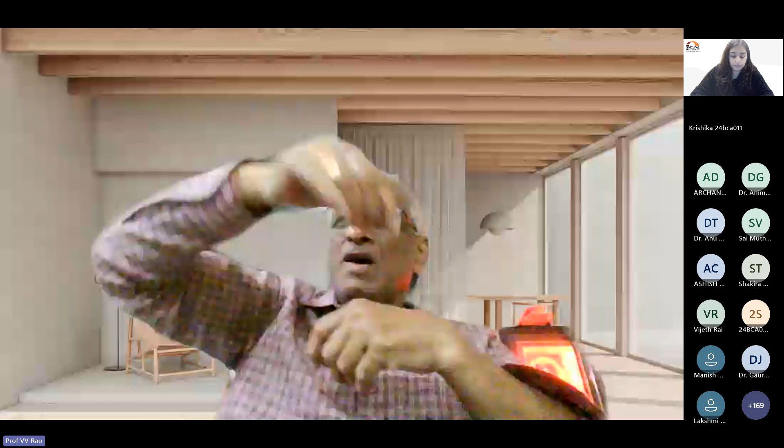Conventional bearing systems are oil lubricated. Magnetic, high-speed magnetic bearings are so perfect - on the spindle there is one circular magnet, and in another casing which is concentric to that, not touching the rotor, there are some additional ring type magnets. In addition, there is an emergency ball bearing which is not operative on the top side. On the bottom side, there is a wick bearing that takes the thrust and huge amount of mass. These turbines are not allowed to tilt - if it tilts, the rotor blades will touch the stator blades and it becomes a grinder. So that bearing action has to be perfect, and the magnetic bearings are very high powerful magnets. Only under high speed rotation does the dynamic balancing take place.

If there is a fellow wants to go to this side, immediately push will come that side. So very high speed reaction forces will come. They try to maintain that.

High speed, that's why whenever there is a levitated train, when it is running, it is very easy to control. Otherwise, when it is slowing down, it is very difficult to slow it down. Same thing here also. When it is in running condition, there is no problem. When it is pickup of the running, then when it is slowing down or when you switch off the things, that's where the problems normally come. So you have to be careful.

That's why you should not brake the turbine at high speed from the axial way. You should brake it tangentially. So on the periphery side, you have to let in some air in a controlled manner. If necessary, if there is a power cut, the turbine will rotate continuously for half an hour because there is nothing to stop it, because there is hardly any vacuum. There is no magnetic bearings to stop it.